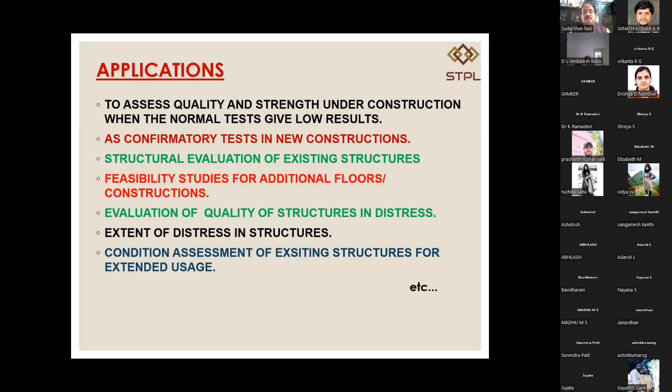Sometimes there is a change of use. For example, you want to convert a space to IT use and put a battery room, and a battery room will have very high loads, to the order of 1 to 1.5 ton per meter square. Most of our commercial buildings are designed for a maximum of about 400 to 500 kg per meter square live load. So where they are going to house batteries or any additional loads, that needs to be checked for structural adequacy, whether it can take the load or not. Such studies can be done through NDT.

Then suppose there is a problem in the structure, some distress, cracks, deflections, or leakages happening. We would like to know what has happened to the structure, whether there is a problem, or why this distress is happening. Through NDT we can find out what the distress is and what the extent of distress is - whether it is really alarming, or in an intermediate stage, or a very mild stage, and whether it can be repaired. Once you know the extent of distress, it becomes easy to work out suitable restoration measures.

And the last one, now picking up especially in more educational institutions, is that the central government is asking them to provide a building stability certificate. Colleges and schools have to provide building stability certificates, and for carrying out such condition assessment of existing structures, non-destructive testing is a must. In fact, it is already prescribed that non-destructive tests must be done to carry out the structural stability study of all educational buildings.

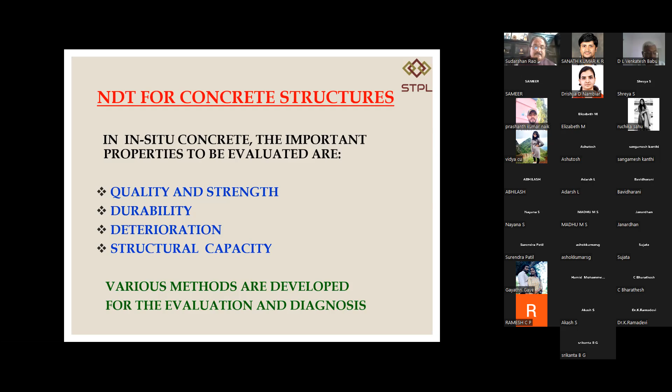To arrive at all these things, there are various methods available. So the testing on concrete structures is basically divided into 4 parts: non-destructive testing, destructive testing where we test to fail, semi-partial destructive tests, and performance tests. So the testing is divided into these 4 types.

So these are the typical definitions. Non-destructive test means testing the structural members without any destruction or damage. We don't cause any destruction or damage to the structure, and then the tests are carried out. Semi-partial destructive test is the testing of members with minimal damage but not affecting the structural integrity.

Like we take a core test or drill a hole. So these are all some localized damages, minimum damages we do, but which will not affect the structural integrity. But still there will be some minimum damage done, so that's why it's called a semi-destructive test.

Destructive test is basically done on precast elements or typical members wherein we would like to know what is its failure load or its structural ultimate load carrying capacity, and then we test one of those members to failure. So they are all destructive tests because that element cannot be used afterwards.

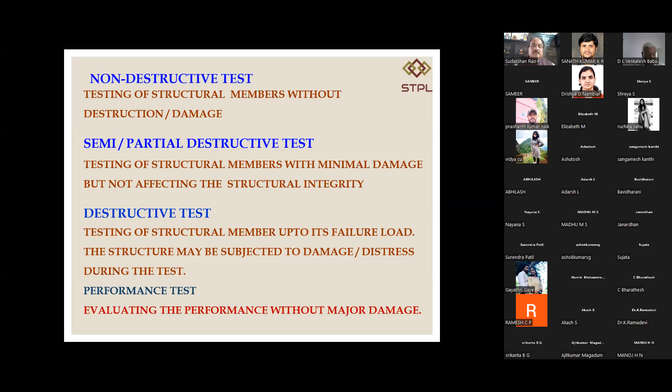And coming to our non-destructive tests for our studies, these are the devices which we use normally. I think most of you know the basic and very simple rebound hammer test, the Schmidt rebound hammer test, then UPV ultrasonic pulse velocity device, impact echo tester, tomography scanner which has come recently into the market and is becoming quite popular. Then cover meters, ground penetrating radar, Halfcell potentiometer test, field permeability apparatus, endoscopy, borescope, crack measuring devices, infrared thermography, pile integrity test.

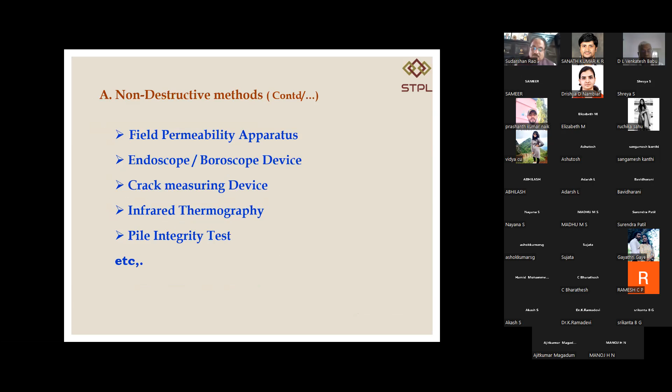Of course, the list goes on. So I'm limiting to this. You can find out many more.

Coming to semi-destructive tests, we have Windsor probe test, cross-hole sonic logging test, Capo test, lock test, bond or adhesion test, core test, then chemical kit for testing of hardened concrete, wherein we take a sample of concrete and test it for chlorides and sulfates at the site, then performance load test.

So some of these methods I'm going to cover in my presentations. There is a lot of study which has been done on these non-destructive devices, and it is very well covered in various standards and regulations all over the world. So these are some of the listings which I have done, so that in each country there is a standard which has been developed for this non-destructive testing. For BIS, the latest is IS 516 and 456, which will give us the details about this testing and the interpretations. So like that, you have so many standards from so many countries.

So coming to non-destructive, let me take you through a few instruments. This is the basic instrument, the rebound hammer test, the N type, which is normally used because we have different types of rebound hammer tests - rebound hammers for masonry, for mass concrete, for thin members, and for normal concrete. So for normal concrete, N type is very widely used.

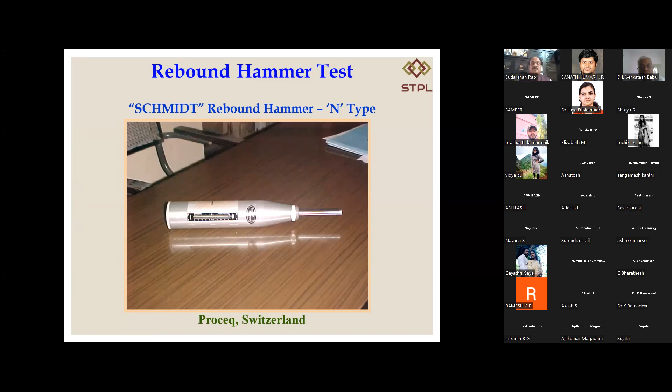So what it does is measure the in-situ strength of concrete near the surface based on the hardness and penetration resistance. The hammer measures the rebound of a spring-loaded mass impacting against the surface of the member. The plunger of the hammer will hit the concrete surface with defined energy, once it is released by the spring, and its rebound depends on the hardness of the concrete and is measured by the test equipment. Then there is a reference chart, for the given concrete, and based on the rebound value, you can find out the compressive strength.

So this is a simple section which explains the working. You have this spring, this plunger, and this mass. You go on pressing this and the spring elongates, imparting certain energy. Once it reaches the latch, it gives way and the mass falls onto the plunger. Depending on hardness, this plunger rebounds. If the surface is very hard, the whole impact energy gets rebound, so you get a high value.

Suppose if this is a soft surface, then you get a mark here and the rebound will be less, so you get a low rebound value number. There is a counter here wherein you can measure the rebound number in terms of number, and that number is correlated to the strength of concrete.

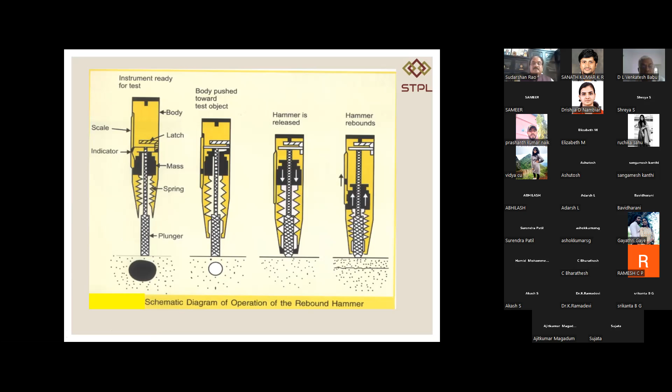These are some of the advanced versions where nowadays you get rebound hammers with recorders, or with chips wherein it can be easily stored. These are some of the latest digitized rebound hammers available, and you can even load or feed it with the calibration strength so that you get the concrete strength directly. If you have a calibration chart, that can be fed in, and when you hit, instead of getting a number, you get the strength of concrete directly. These are all the latest ones available.

The test requirement is that it should be conducted on the concrete surface. It should never be done on a plaster surface. In case the member is plastered, which happens in most existing structures, you have to cut open the plaster, expose the concrete surface, clean it, and make it as smooth and uniform as possible, then carry out the test on the dry concrete surface. You should not do it on a wet concrete surface. One has to be quite careful.

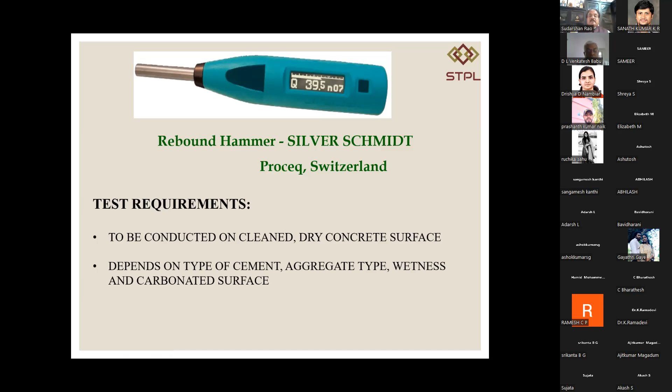Even though it looks a very simple test, one has to take a lot of care while doing it, because you get a very wide range of readings sometimes, and you have to leave out the freak readings. At a given location, if you are getting low readings, you have to find out further, examine why. Maybe it may be a debonded or delaminated concrete due to corrosion, or maybe some other reason. You have to find out exactly why you are getting low readings, and that's how you have to arrive at it.

This is very important, because as I told you, this rebound hammer has got a spring inside. Every time we hit the rebound hammer, the spring elongates and contracts. It has a life, maybe about 5,000 or 6,000 repetitions. Afterwards, the spring loses its stiffness and your readings will not be the correct ones. You may start getting erratic readings. That is why before you do the test every time, you have to do this calibration using this anvil.

Only when it shows that reading does it mean your spring is still in good condition, and then only can you use it in the field. If it shows a very different reading, that means the rebound hammer spring needs to be changed or serviced. So before you do the test, always check it with respect to the anvil, and only then carry out the test in the field.

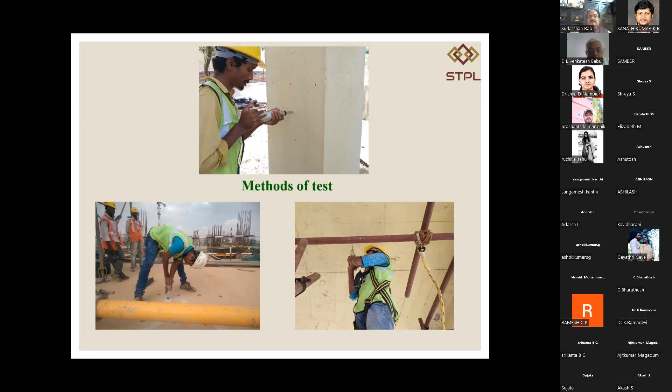This is how the tests are done, either horizontally or vertically in different situations. If you want to do it on a floor slab, it is held vertically downward. For columns it is horizontal, or if it is a slab ceiling, it is held vertically upward.

When held in different positions, the mass will be moving either against gravity or towards gravity. Accordingly, the rebound hammer numbers will change and we need to do corrections. These are the corrections given by the instrument manual.

For example, if it is held upward, your weight is drawn by gravity, and hence you get a higher reading when the rebound occurs, since it is drawn by gravity. So the correction has to be negative.

Similarly, when holding it downward, the rebound is occurring against gravity, so it gives a lesser reading, and you have to do a positive correction. These are the corrections given by the instrument manual, and every instrument you purchase will have these corrections, which should be adopted for rebound hammer tests done at different positions.

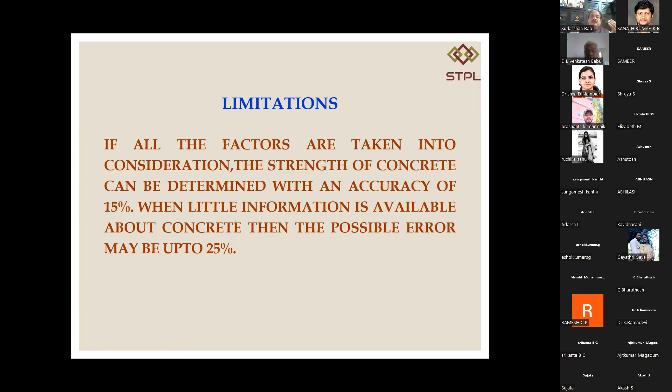If all the factors are taken into consideration, the strength of concrete can be determined with an accuracy of about 10 to 15%. When little information is available about the concrete, the possible error could be even up to 25%. This percentage of prediction depends on experience - a person with good experience who does the test properly can achieve less and less error.

Coming to the ultrasonic pulse velocity test, this is measured by passing the pulse velocity through the body of concrete. The measurement of ultrasonic pulse generated through piezoelectric crystal probes to the concrete is indicated in the timing device.

It is used generally to check the quality of concrete - the compaction, uniformity, delamination, cracks, presence of honeycombs, voids, etc. One thing you have to be careful about: ultrasonic pulse velocity test will not give you the strength of concrete.

If you have to go for strength, either do a rebound hammer test or go for a core test. Whereas for a lower grade of concrete, up to about M25, you can generate some calibration graphs to arrive at the strength of concrete.

But for anything more than M25, the readings are going to be almost the same. For M40 concrete and M30 concrete, there is not much difference in the ultrasonic pulse velocity values, and hence it is very difficult to arrive at exactly the strength of concrete through UPV tests.

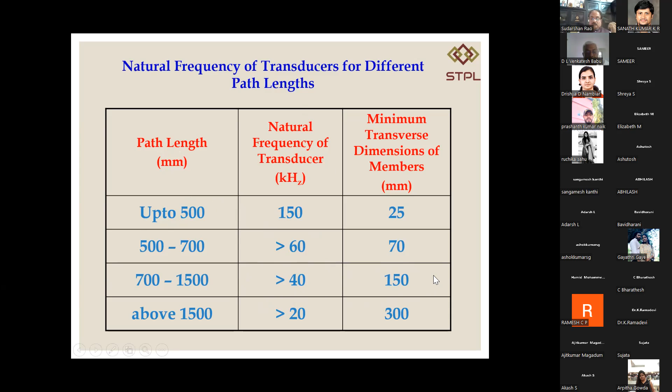Depending on how we hold the probes, there are three methods: direct transmission, indirect transmission, and semi-direct transmission. It depends on the accessibility of the given member and the surface available for testing. For example, in most beams and columns, you can put the two probes on either side of the parallel, opposite surface. This is the easiest and best way of doing the test, where direct transmission happens.

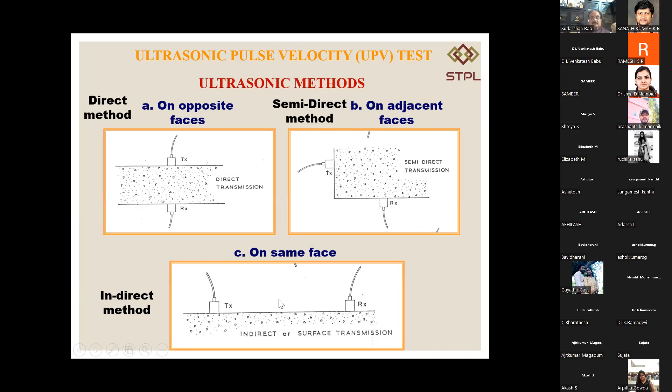Ultrasonic pulse velocity again depends on many factors, like the aggregate size and the minimum path length we choose. The path length should be at least more than 4 times the aggregate size. That means if most of our concrete members are made with 20 mm down-size aggregates, then your minimum path length should be at least 80 to 100 mm, so that you can use this test.

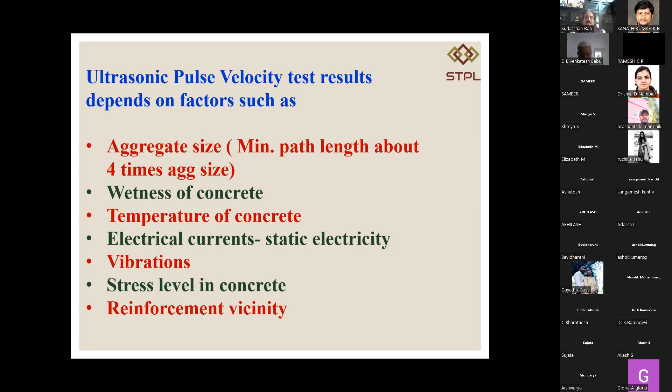There are some studies done to find out whether there is variation in ultrasonic pulse velocity at different stress levels, and it shows there is some variation. Also, if there are any reinforcements in the vicinity when you do the test, you get very low path or time taken, like only 5.6 microseconds for the pulse to pass. This shows that the pulse is passing through the reinforcement, and you have to shift the location of the probe.

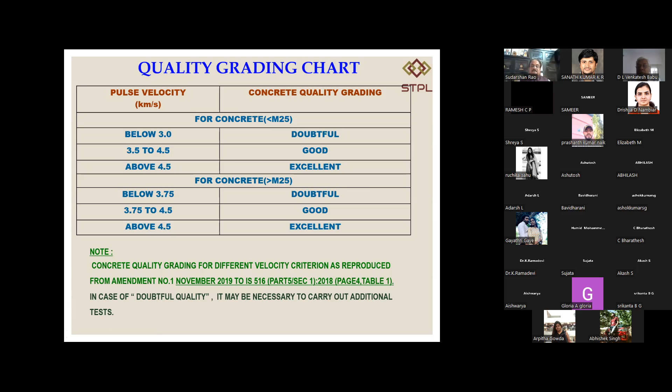In case we want to predict strength, below M25 grade of concrete you will be able to predict it with some accuracy. For that, you have to establish your own calibration chart: cast cubes of various strengths, find their ultrasonic pulse velocity, and also carry out compressive strength tests. Then plot ultrasonic pulse velocity on one axis and strength on the other axis to draw a calibration chart. This can then be used for strength assessment. But for higher grades of strength, more than M25, you will not be able to predict this accurately.

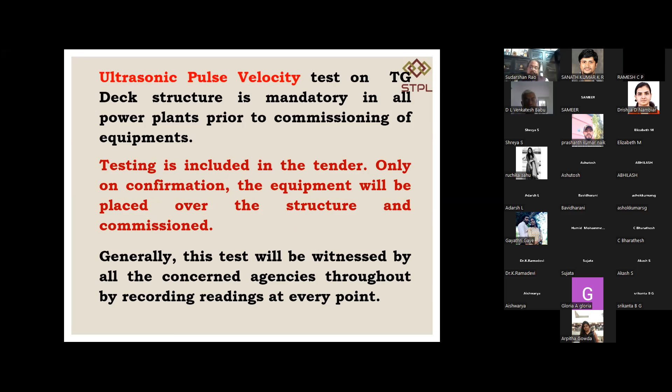This is one of the applications where we used ultrasonic pulse velocity. In most power plants, before erecting the turbo generator foundations, it's mandatory to check the quality of concrete through non-destructive testing. It's a huge structure, as you can see, with slabs about 1.5 meters deep, and it's an elevated structure. They would like to find out the overall uniformity and quality of the concrete.

For that, we make a grid of 300mm by 300mm, with each point being a position where the probe is kept. Wherever possible, you can use either semi-direct or direct methods. For example, this surface can be done direct, this wall direct, but this block and this other section only semi-direct will be possible. You have to devise the method accordingly, and you get more than 3,000 to 4,000 readings, which you analyze and plot to conclude whether the concrete quality is quite uniform or not. This is one of the tests we carried out.

That's how this marking is being done. And what you see here is grease being kept, which is used as a couplant for the probes. And this is the top of the generator foundation. And this is how it is done.

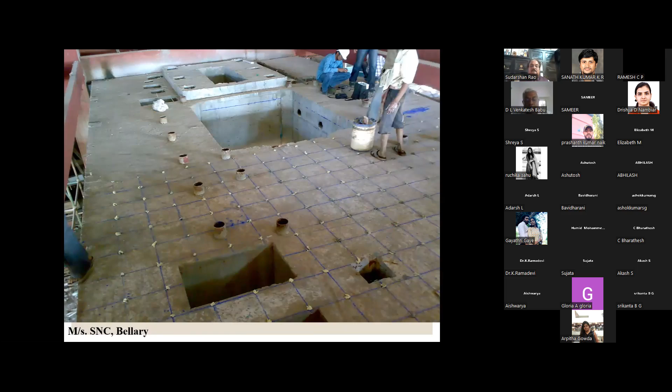For example, in this case, only indirect method is possible, and for this one, you can do direct. So all types of methods we use. Based on this, we carry out the test, plot all the values, and come to a conclusion regarding the uniformity and quality of concrete.

So these are the limitations of the ultrasonic pulse velocity test. For larger path lengths, you need attenuators, and maximum we can go is up to 2.5 meters. Beyond that you will not get good readings, because the ultrasonic pulse gets diversified or dispersed, and hardly you will be able to receive anything.

So larger path lengths again has a limitation, and very thin members, as I told you, has a limitation. It can help only in quality grading - good, better or excellent concrete - but no strength determination.

And local deformity in concrete will be very difficult to find, because unless we probe that exact area, we will not be able to find out a localized deformity or the location of deformity.

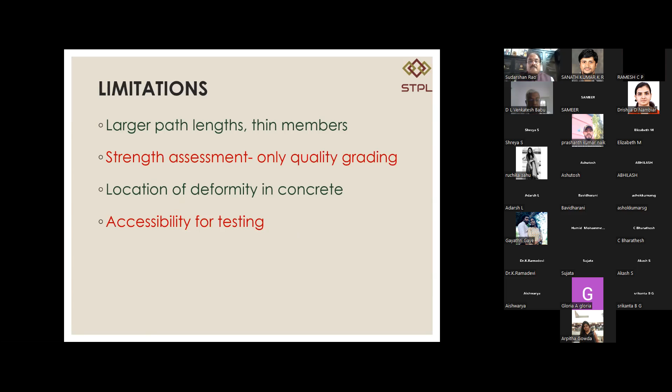Accessibility for testing is also a challenge, and it depends on the type of structure. So with all these limitations, this is still a very handy and useful test, which can be used to arrive at the quality of in situ concrete.

Then we have the impact echo tester. Earlier we had one transducer and one receiver, wherein the pulse was passed through, whereas here you have a single probe, and we produce a small impact on the surface of the concrete. The impact passes inside, comes back, and the probe receives the impact vibrations, which is then analyzed.

The resulting displacement versus time signals are transformed into the frequency domain. Plots of amplitude versus frequency are obtained, and multiple reflections give rise to transient resonances, which can be used to evaluate the integrity. In a solid structure, it gives distinctive wave formations and the spectra is produced. If there are flaws, the patterns get disrupted, and depending on the pattern, we can find out what could be the defect inside the concrete.

And this is very powerful and useful when only one surface is accessible.

This is how the test is done. So you have a transducer receiver, and a small hammer, and you give a small impact blow. The vibrations or waves produced go into the concrete, and once it hits a hard surface, it...

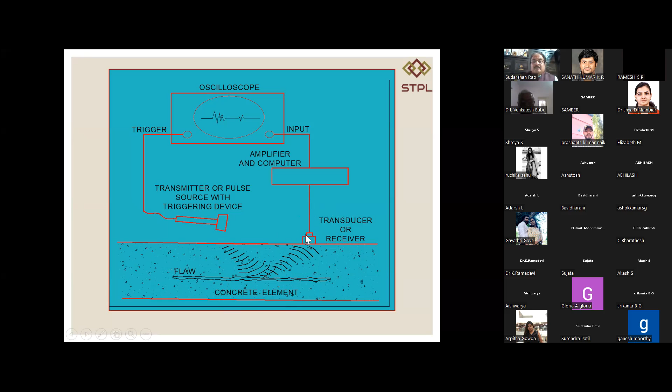So based on this, you will be able to determine what the defect is in the concrete.

So this is how the test is done, using a probe and a small hammer. It can be tested on beams, slabs, concrete, retaining walls, and all that. One thing is that this test is done at only one location and one point, and you have to carry it out at a number of locations to find out.

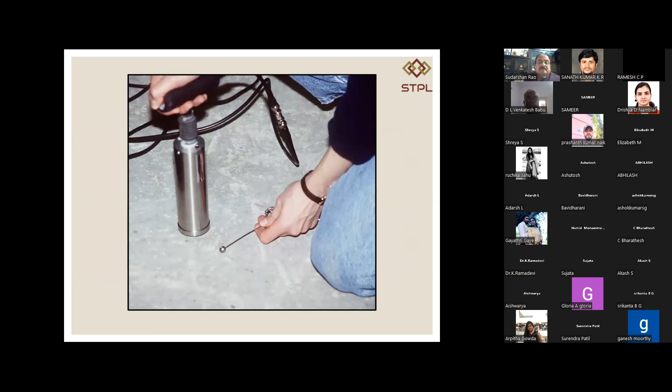There is an improved version of this called ultrasonic tomography, which is a combination of impact echo and ultrasonic pulse. Here it has a series of probes, about 40 to 45 transmitting and receiving transducers, and each of the probes can act as either receiver or transmitter with a default operating ultrasonic frequency.

When you run this device on the surface of concrete, it gives a number of signals. It measures the time of signal propagation between the transducers at fixed distances for material velocity calibration, and uses synthetic aperture focusing techniques, a software technique for analysis in scan mode, to reconstruct the medium below the measurement based on the wave reflections.

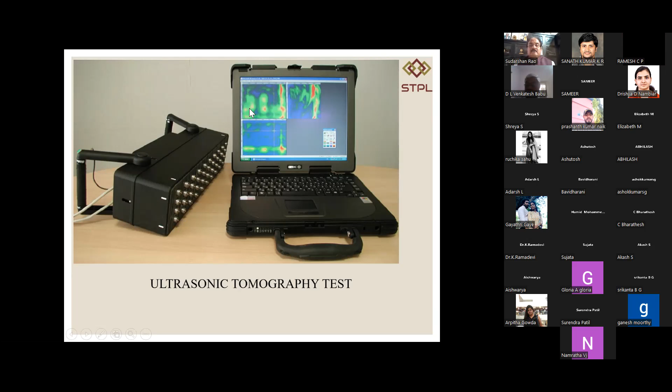That means you have a number of probes. This is the equipment, and you can see there are a number of probes here, about 40 to 50 probes. This comes with the analyzer, and it can give you 3D images of the concrete and what is inside it. It can directly tell you.

This operation applies the echo technique, and it requires access to only one side of the object. Even if only one side is available, you will be able to use this instrument. It is feasible for concrete inspection, for searching conduit ducts and the health of pre-stressing cables, and for finding foreign inclusions, holes, honeycombing, cracks, and other defects inside concrete objects.

The advantage of this is that it can actually locate where the problem is and give you a 3D picture of the concrete. So this is how it is done. As I told you, it has a number of probes that send out pulses which pass through, and each one acts as both a transmitter and a receiver, and you get a number of signals which are processed.

So it can be used on one side, either in a tunnel lining, if you want to know how good the lining is, or on walls, or on the floor. So for any structural element, it can be used.

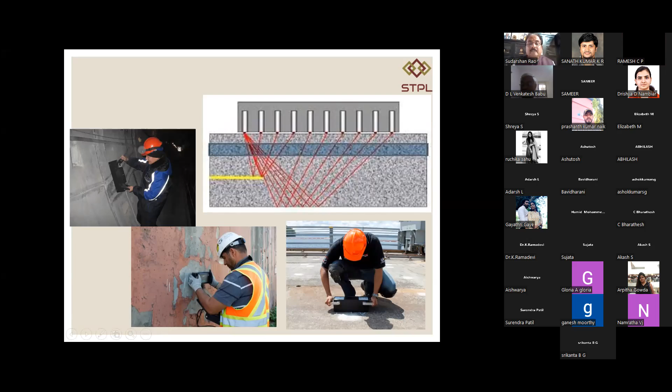And this is how the images you get look. You can get a 3D image, and it can give you the location. For example, here, all these lines you see are the rebars. If there is any problem below, it will show up, and you can take a slice and know exactly where the problem is. For example, here, this is the bottom of the member, that's why it shows one reflection.

And there are some voids here - there may be some reinforcement lines, and there are voids here. So you can find out exactly the location and depth, whether there is any foreign material or a void. All those things can be found out, and it can be sliced, and then like a body scanner, you can take out the images and check.

So this instrument is becoming quite handy and more useful, especially in thin members and also in PSC members, for knowing if there are any problems or surface cracks. You would like to know what depth the crack has gone into - is it extending through, or ending at some depth. All those things can be done through this tomography.

Then coming to parameter tests, after concrete, we will go to reinforcement. The cover meter test uses electromagnetic pulse induction technology to detect rebars. Suppose you have a slab with bars, and you would like to know what reinforcement is provided, the spacing, and at what depth it is - these things can be done easily with this cover meter or profometer, which works on an electromagnetic principle.

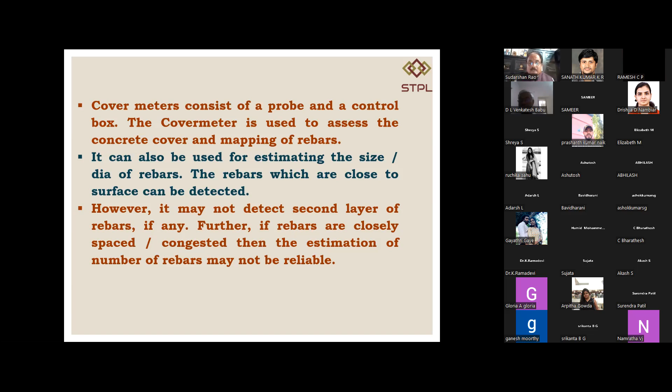This is one of the earlier cover meters, the profometer. The Proceq equipments came up with this kind of instrument. Initially it was not digitized, it was with a meter. You have to go on moving the probe, and suddenly when there is a change in the reading, you know that the reinforcement is there in that location. That's how this was used in the earlier days - in the 80s this was the method.

Now it has come out very handy - you can just run or pass it over the concrete member and you will get the probable diameter and the depth. These are the cover meters, named profometers by Proceq, and there are different types which have evolved: profometer 2, the very primitive one I showed, then profometer 3, then profometer 4 which had different probes - one for the cover and one for the diameter. Now we have profometer 5 and profometer 6, wherein a single probe can be used both for determination of diameter as well as the cover depth. This is the latest which can be used.

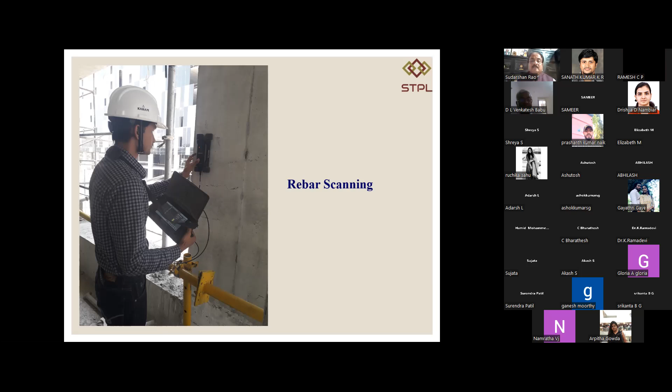So this is another one by another company. Again you can see here the rebars can be mapped.

And Hilti has come out again with this Ferroscan. This is also a very handy equipment wherein you can just use this and roll it over the concrete surface. Wherever the reinforcement is, it will catch it, and then it will give you a diagram or a drawing depending on the position of the reinforcement, and also you get the bar diameter. So this is one typical output image wherein you can find out the bar diameter and also the position of bars.

This limitation aside, it is very useful for structural evaluation, where in the absence of drawings we have to find out what rebars are provided, what is the spacing, what are the numbers, and all that. So for that, it is very useful.

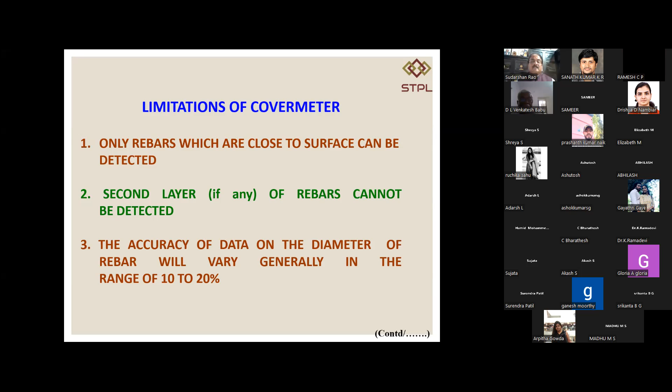However, the limitations are: only bars very close to the surface can be detected. A second layer, if it is there, cannot be detected. And the accuracy of the diameter of the bar will generally be in the range of 10 to 20%. Suppose you get 18mm as the diameter of the bar, it may actually be 16mm or it could be 20mm - so you have some 10 to 20% variation on the bar diameter. You may not be able to predict accurately because most of the bars we use are high yield strength bars, which don't have a perfectly round diameter because of the presence of ribs and all that, so you will not be able to accurately predict the diameter of the bar.

And if the bars are placed very closely, like in some deep heavy beams and all that, it becomes a bit difficult to find out the actual number of bars. Generally, if the cover concrete is more than 60 to 75mm, it will again be difficult to locate the position of the bars. So up to about 60 to 75mm, normal cover meters will be able to find the bars. But now they have some new models which can go up to 185mm. The normal cover meters in the market will be able to go up to about 60 to 70mm.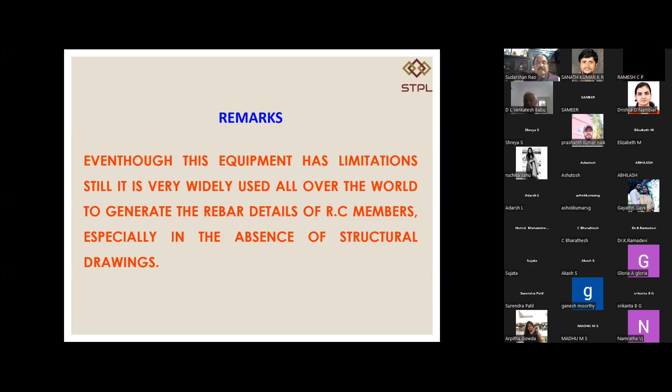But as I told you, in the absence of data about the rebars, this is a very handy tool wherein we can find out the position, disposition, bar diameter, and all that in structural members without really breaking open or keeping open the concrete.

Then we have this latest one, the ground penetrating radar. This is a geophysical method based on electromagnetic wave propagation. Earlier we had ultrasonic wave propagations or impact waves.

Now this depends on electromagnetic wave propagation, because it goes to quite deeper depths. That is why we need a strong wave, and it detects the interfaces between materials having various electrical characteristics. So when we place the probe on the surface, the waves go down, and whenever there is a different material or a void, these waves get reflected and again they are captured.

Depending on the extent to which the waves are captured, they are synthesized, and then we get a picture of those obstacles or variations. Depending on the reflections, we will be able to arrive at the type of object inside, or whatever the defect.

So the system has an antenna which has both the transmitting and receiving probes, and then it has a central control unit which governs the characteristics of electromagnetic waves. It amplifies the received and reflected waves and converts into a digital format. And then we have a video display unit which receives the digital format, processes it through the software, and produces a graphical output as a two-dimensional depth profile.

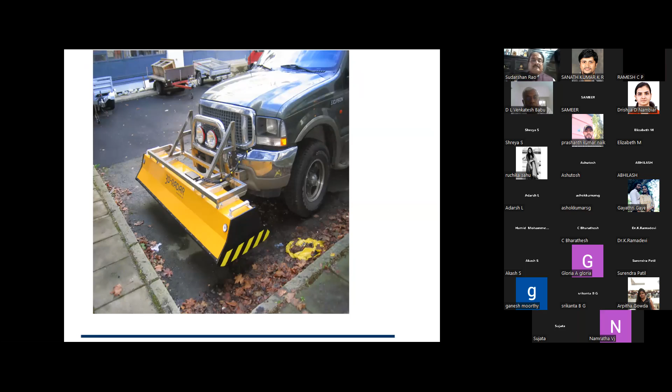So this is the basic principle: the electromagnetic waves go in and then hit different surfaces, then get reflected. You get different reflections, which are again synthesized, and then it comes out in a graphic format.

So these are the different applications of ground penetrating radars. Suppose you have a very short range, up to a depth of about 1.5 meters, like our pavements, road structures, foundations, bridge structures, and building structures, the beams and all that. For that range, we use very high frequency probes, and the frequency will be in the range of about 1500 megahertz.

And if you are going for a medium range... sometimes if there is a second layer of reinforcements, this can detect it, but it may not be able to give you the diameter. It can tell you whether this second layer of reinforcement is present or not. That can be done with this ground probing radar.

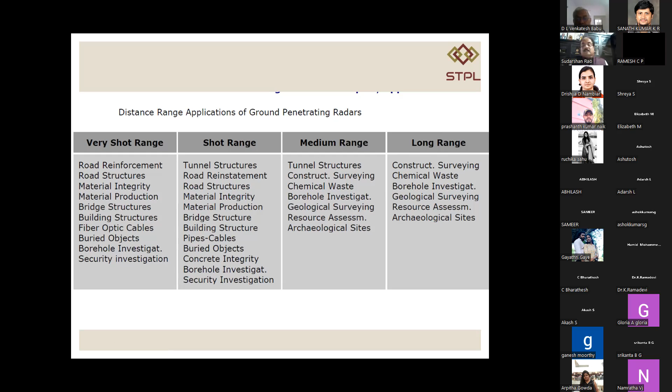One of the applications of this GPR was in the inspection of the Ayodhya site at Ram Mandir, to know whether there were any underground structures. Long range probes were used, and with that they were able to predict that yes, there is something inside the ground.

So this is how the application works for concrete structures. The central processing unit can be kept, and then you can move around. This is a typical view of our slabs. You can find out the bars, rebar, circular, and it will give a wave shape like this.

So this shows that there is a top set of rebars, and then you have a base set of rebars here, and then there is a beam here, and again there is a beam. It will not give you what we saw in tomography. It will give an indication, and it requires sufficient experience to analyze these images.

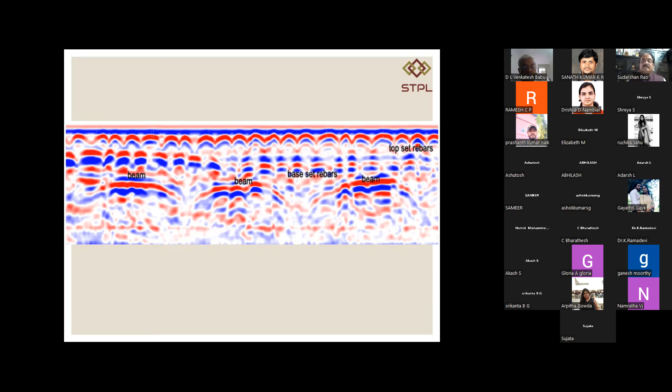So you can see here different ways of doing this. Nowadays, this GPR has become quite handy. Even in small sizes it has come, which can be used, and you will get the image processor in small ones. Especially, this application can be done for concrete structures.

And in case you have embedded pipes, this is how the image comes. So this slab shows the top layer of bars, and this is the location of the pipes. A circular object will be shown as some sort of a parabola, because of how the images are formed when they hit and reflect, finally a circle turns into a parabola. So you need some amount of knowledge to decipher these images, and based on that you can scan the concrete.

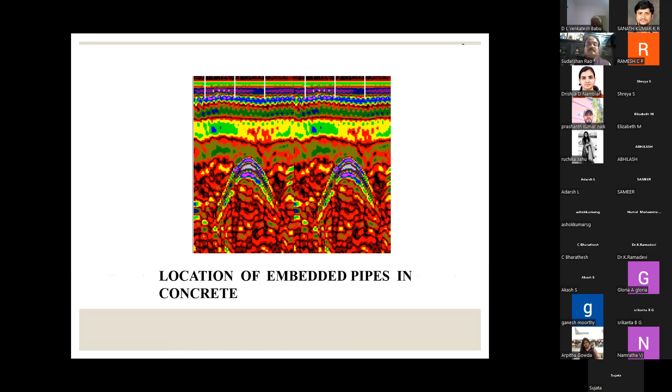Typical applications include GPR surveys on walls, like retaining walls. You can do this with this instrument. The advantage is that it's very handy. It can be moved around, and most surfaces of overall structures can be covered for scanning.

And these are some more applications. If you're scanning a slab, as I told you, the rebars will be seen as parabolas and similar patterns. So they have done the test at the pipe location, and that's how these images come, which then need to be analyzed.

The limitations are you need different antennas for different depths. For example, if you're going for deeper depths, you will need an antenna with lower frequency. And to analyze the images, you need proper skill and past experience. Otherwise, interpretation is quite tedious.

The objects and interferences are only indicative, because you will not know exactly what they are. Suppose you see there is a pipe inside, you will not be able to know whether it is PVC or metal, or what its diameter is. You know there is a pipe, and you can find the approximate size, and the location, but the actual object cannot be determined.

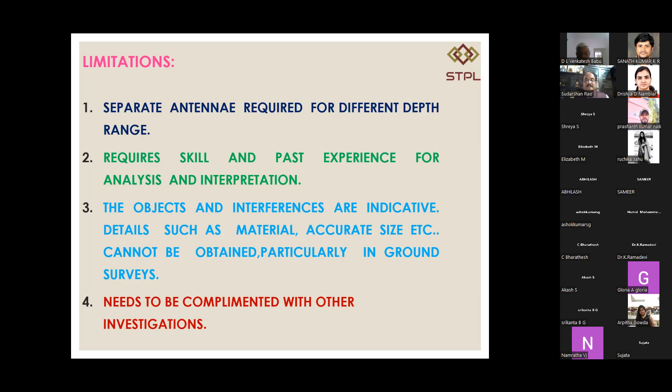This always needs to be complemented with other investigation. So the advantage is you can find out and say there is something inside, and then it has to be checked with further investigation, maybe making a small hole or opening to see what exactly is there. So you can pinpoint if there is a defect, identify it, and give the location of the defect, but what the defect actually is needs to be checked with other methods.

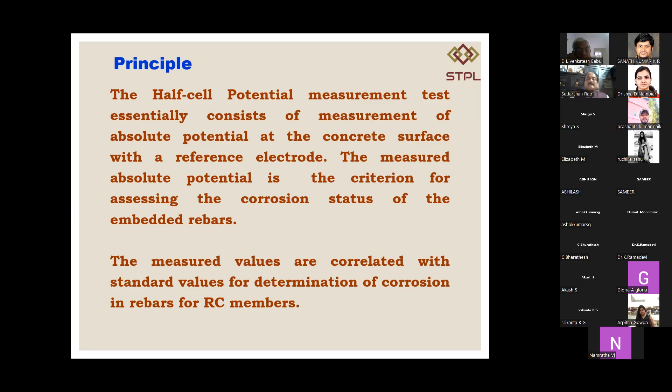Then we come to the Half Cell Potentiometer. This is an instrument used to find out the corrosion, the extent of corrosion, in RC members. The half cell potential measurement essentially consists of measuring the absolute potential at the concrete surface with a reference electrode. This measured absolute potential is the criteria for assessing the corrosion status of the embedded rebars, and the measured values are correlated with standard values.

This is how the scanning is done on a structure, where each point is a half cell reading. So you have a number of cells. If you want to scan the structure, instead of placing and finding each cell every time, you can have the half cells in series, and then record the readings.

Typically, scanning is the most popular method using this instrument. It has a copper sulfate half cell, and then two electrical points coming out - one connected to the rebar, and one on the wet concrete surface. The wet concrete surface acts as an electrolyte to transfer the charges, and the potential difference between these two will tell us.

Millivolts. So like that, we can determine the corrosion status.

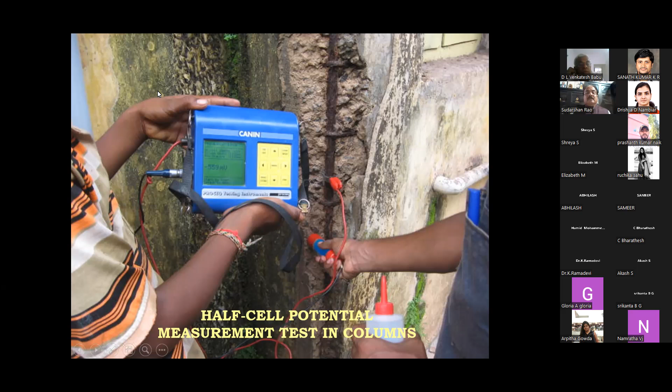Now there is an IS code which has come up for high-rise structures, our Indian standards, wherein they have made it mandatory to measure the field permeability of concrete. And I think these instruments are going to be used more frequently from here onwards. You can find out the permeability either through gas permeability or water permeability.

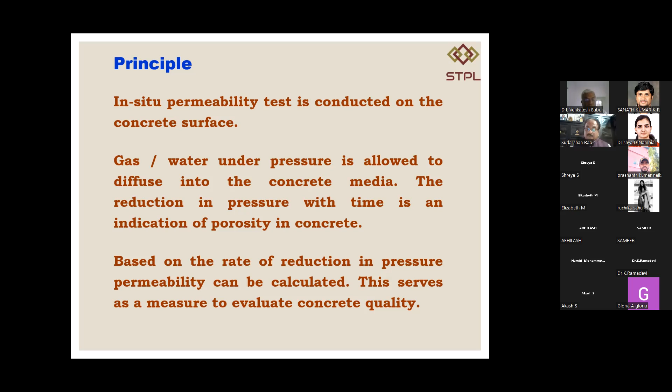Here, gas or water under pressure is allowed to diffuse into the concrete media, and the reduction in pressure with time is an indication of the porosity in concrete. Based on the rate of reduction in pressure, permeability can be calculated. There are standard curves or standard formulae which come along with the equipment, through which we can calculate the permeability of in situ concrete.

Now we have the borescope. Sometimes this is quite widely used in medical applications, like endoscopy, where if there is something wrong with the stomach, to find out what is inside, they introduce a tool with an optical camera and light, and then they examine it. A similar instrument is available for civil engineering applications, and it is called the borescope.

It also has a flexible tube, an optical camera with an eyepiece, and illumination available. We can make a hole, or if there is a void, we can insert it inside the concrete mass, and it travels inside so you can know what's happening actually inside the concrete. It's very useful in health inspection and health monitoring of embedded PSC cables in bridge girders and other concrete members.

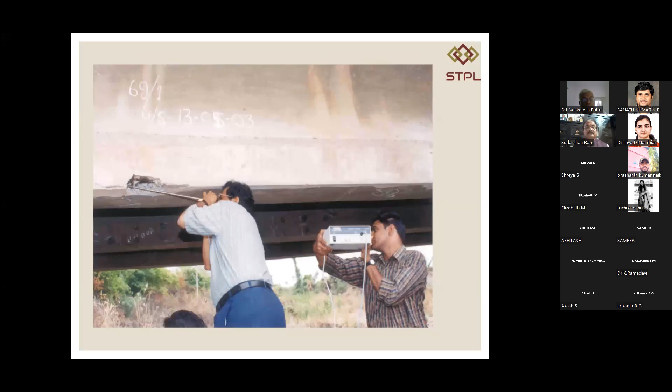This is one of the pictures of a PSC cable which got corroded, and they wanted to know the extent of corrosion. Through this borescope, they make a hole and insert it, and they can capture and know the status of corrosion in the PSC cables. So this is how it can be used.

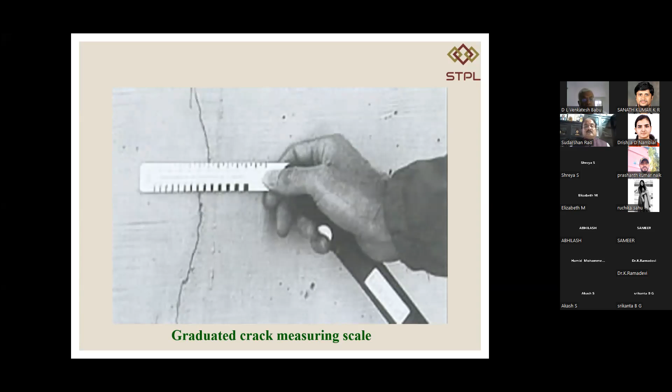We have crack measuring devices. Whenever there is some distress, the building cracks, the structure cracks, and we want to know what is the crack width, and also monitor whether the crack is widening. There are different devices available: a simple graduated scale which you can place on the crack to find out the crack width, or an optical microscope wherein you can read the crack width.

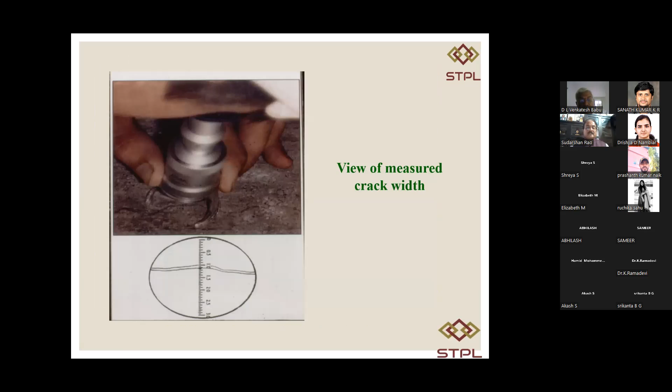Or you have a DEMEC gauge wherein it can be fixed, and if the crack widens, you will get a reading so you can monitor it. This is mainly for monitoring the crack width, whether it's widening or not. There are also typical optical magnifying lenses which can be used to check the crack, and it has a graduated scale inside so you can measure the crack width in millimeters.

There are many things available. This comes with a lighting device, LED. So when you place it on top over the crack, it gets illuminated so that you'll be able to measure it properly.

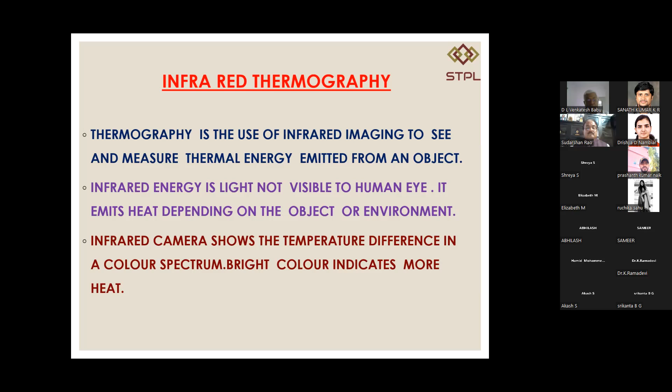If that is captured through an infrared camera, you can find out if there is any temperature variation on the surface of any object or concrete. The change in temperature on the surface of concrete can happen mainly due to dampness or leakage. So when you capture the surface of concrete or a wall, if there is dampness or leakage inside, you will get the regions which are damp, which may not be visible to our eye.

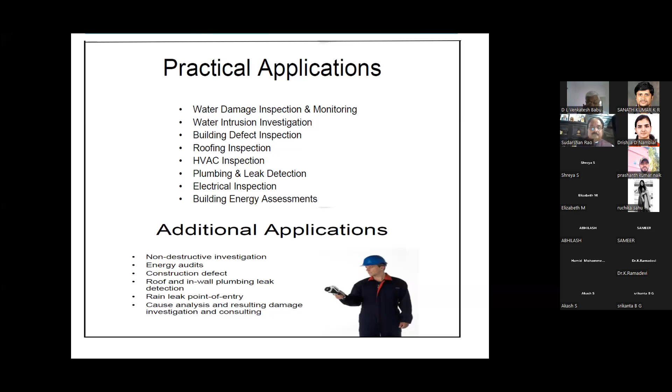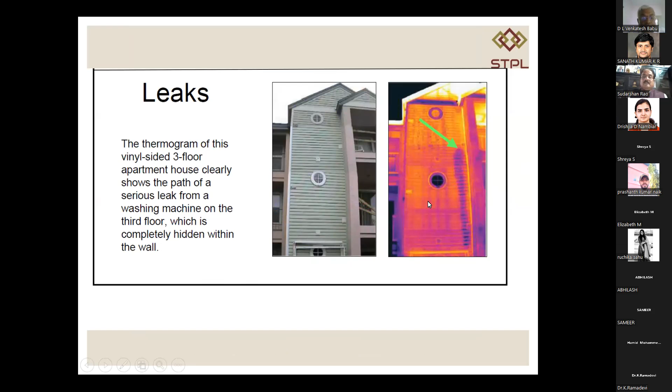For example, if you see this building, you don't see any leakage at all from outside. But when you take it with an infrared, you find that there is a leakage causing dampness. So like this, you will be able to detect easily.

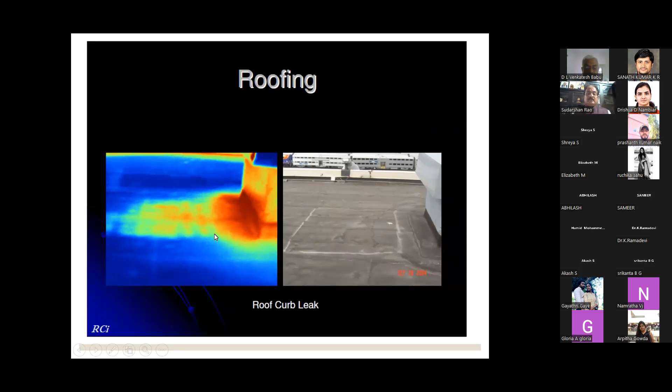Then on the roof, if there is any accumulation of moisture or dampness, even though from outside you don't see anything, these are the areas where there is some percolation and accumulation of moisture or water, which can lead to leakages.

Similarly, in the floor, you can detect any leakages or water intrusions easily using this infrared thermography. The advantage is it's very quick.

It's just taking a photograph and then checking it, and it's a non-intrusive means of investigation. We don't need to do anything to the existing environment, and it does not require any relocation of the occupant, and it's quite illustrative, and can be used for confirmation of failure points and moisture migration paths.

The only disadvantage is it will not see through the walls, and only up to a certain depth, if there is a change in temperature, it can detect. If there is a leakage quite deep inside, then it cannot detect. That's the only disadvantage.

Then we have pile integrity tests, which are used to find out the health of a pile, because once the pile is installed in the ground, we do not know whether the concrete is good, whether the quality of concrete is fine, whether it has formed as a proper shaft or cylindrical element.

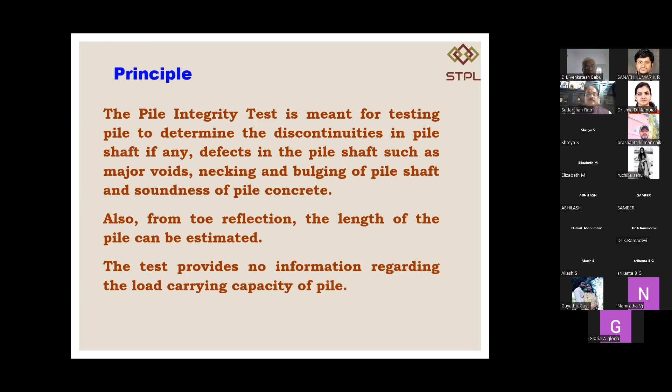Are there any bulging out or necking? Are there any voids in the concrete? We'll not be able to make out anything otherwise. This is a very useful tool, an instrument, through which we can find out the health of the pile.

It's a very simple instrument. It has got a pile tester analyzer, then a hammer to give an impact, and a probe or accelerometer which receives the waves, which is then analyzed, giving the signature of these waves.

You have the pile, and you put this accelerometer on the surface, and then you hit with a hammer, and capture a signature. On the pile, you do this at about 3-4 locations, capture the images, and then synthesize all these images to remove the noise and remove the high frequency waves and so on.

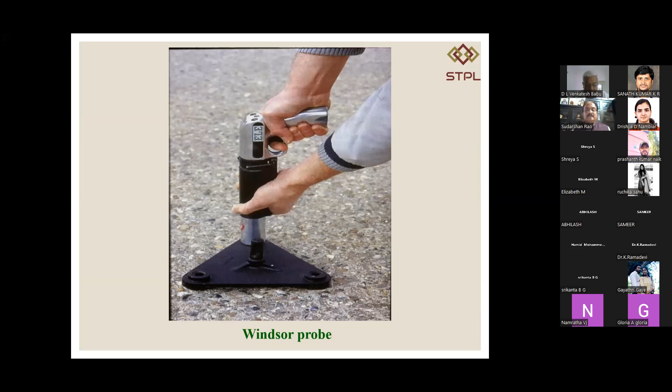Now this test is banned because here what we do is it has got a pistol and then it has got a bullet, and then we shoot it onto the surface of concrete, and then we measure the depth of penetration, and based on the depth of penetration we find out the hardness of concrete. But due to the possibility of this being misused, now this test is banned.

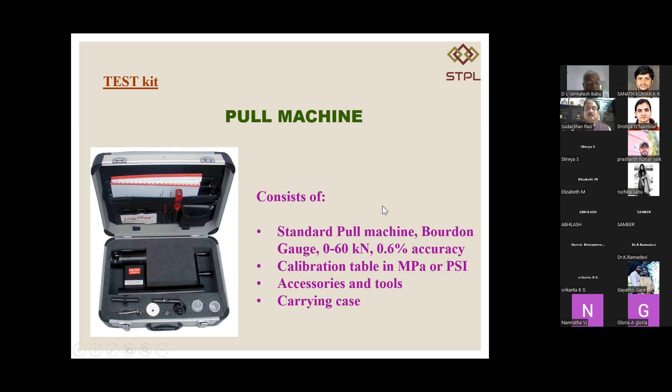Then we have the Capo test, wherein we can find out the in-situ concrete strength. So what we do is, this Capo test machine, it is done on the existing concrete.

So what we do is first we make a hole, and then we insert this, what do you call, a grip expansion bolt inside the hole.

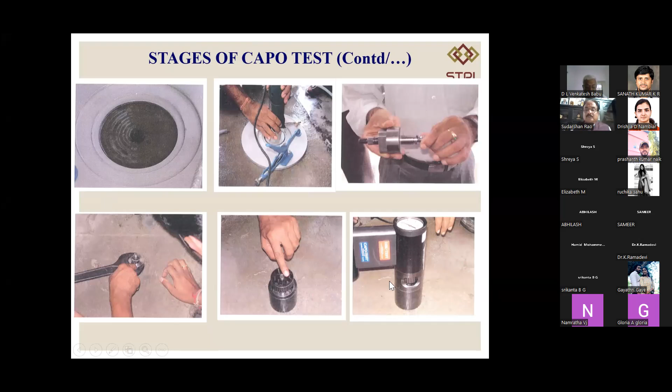And then after that, we put the loading mechanism, and then we operate it like this. And when it is rotated, because of this enlarged base, the concrete comes out like a frustum of a cone. And the load which is taken for this failure is correlated to the strength of concrete. So that's how it is done in the Capo test.

And similar to that is a LOK-test or a pull-out test, but this test is done on preset anchors. That means the Capo test can be done on any concrete, and the only thing is you have to drill a hole, insert this bolt, turn it to make it wider, and then pull out. Whereas in a pull-out test, even before the concrete is cast, these kinds of inserts are fixed inside the concrete or inside the rebar cage using the shuttering material.

So you make a hole in the shuttering material, insert this bolt or anchor, and then tighten it and leave it. Once the concreting is done, at any age, if you want to know what strength is achieved, you just have to de-shutter it, and then fix this device on the anchor, rotate it, and you will know the strength of concrete.

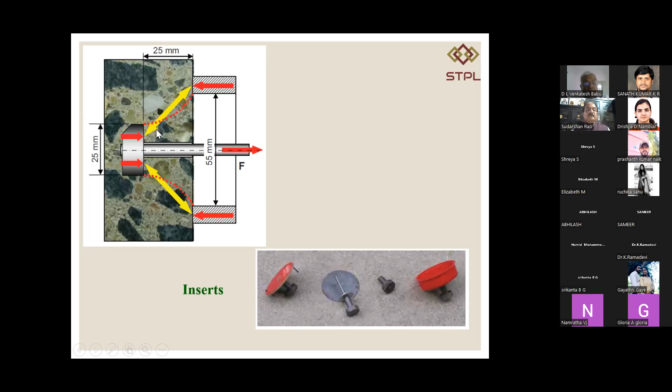So this is how this test is done, the prefixed anchors.

And then we have the bond or adhesion test. Nowadays we have a lot of tiles and coatings which are coated on the concrete or on the mortar surface, and the tiles are fixed. So we would like to know whether it is properly bonded, or what is the adhesion strength. This test is used, and first we make a core to segregate the coating from the rest of the body of the surface, and then you fix a dolly, a pull machine or a dyna pull-off onto the surface with the coating, and then you do a pull-out test.

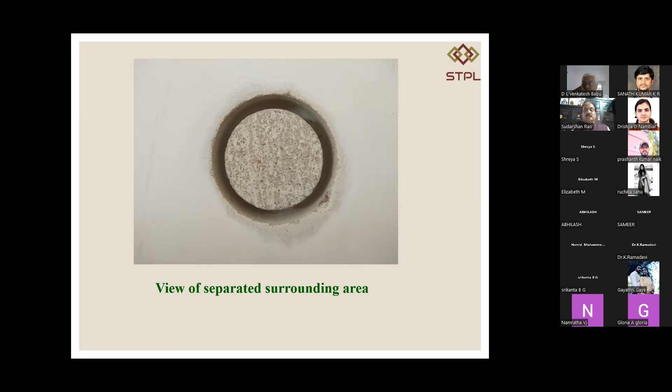So first you make a core, separating this area from the rest of the surface. Suppose you have done the plaster and there is a lot of debonding, and you would like to know whether the plaster is properly adhering, if there are issues with curing, whether the plaster is properly adhering to the masonry or not - then you can do this test.

So you are fixing the dyna pull. This is the dolly, which is glued onto that drilled core, and then the pull-out is done. Based on the pull-out strength, you can find out what is the adhesion and whether it is acceptable or not.

Many times we use anchor bolts or rebar anchors which are embedded into concrete for further construction, so we need to check the pull-out strength. For that, we have designed a device wherein we have a frame with jacks, and it is a pull-out test.

Many times they say they want to test whether it can take 3 tons, 4 tons and so on, so we add another 10% extra and test it up to that. In case they want to know what is the failure, what is the ultimate pull-out force, then we test it up to failure. So this is how this test can be done on the anchor test.

Now the core test is the most widely used and very popular test, wherein we take the core. The diameter of the core to be taken has to be chosen carefully - it has to be at least a minimum of 3 times the aggregate size, and the bigger the core diameter, the better the accuracy. So always try, if there is a possibility, to get a 100 mm core or a bigger diameter core, as that will really give you the most reliable results.

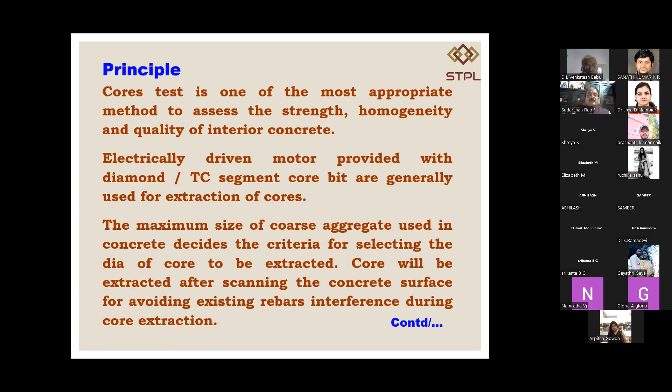And then the cores are taken through core cutting devices - that's how it can be taken from the floor. Before we take the core, we have to make sure there is no interference from the rebars, so we can use a profometer or cover meter to find out the location of the bars, and then fix the location of core extraction so that we can take the core accordingly.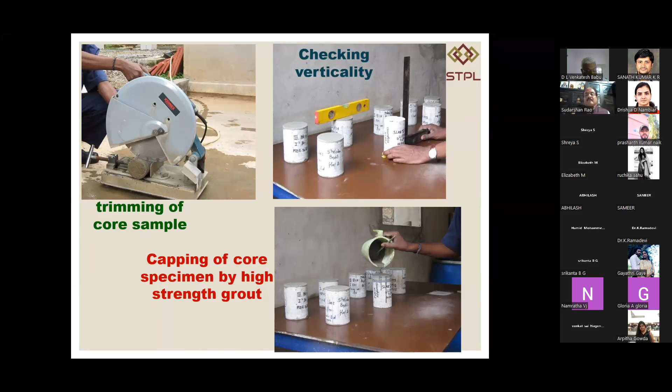So from the floor we can take it, and once the cores are taken, they are trimmed, and you have to maintain perfectly parallel surfaces for testing. Then you have to do capping, and capping is done either with sulfur or with high strength grout, and the capping thickness has to be as minimum as possible to get a parallel surface.

After that it is tested in a compression testing machine, and you have a standard methodology to apply corrections for the diameter, the L/D ratio, and then a correlation between the cylinder - because core is a cylinder - and to convert from cylinder to equivalent cube strength you have to multiply by 1.25. So with all these corrections applied, you will finally arrive at the equivalent cube strength.

If this equivalent cube strength - the acceptance criteria is that the average equivalent cube strength from the cores should be equal to at least 85% of the cube strength. Suppose you have M35 grade, that's 0.85 times 35. So if your average equivalent cube strength from the cores is more than 0.85 times 35, then you can say that it has achieved the M35 grade.

So it need not be M35 and above - it should be 85% or above, and any one of the cores can have strength between 75 to 85. Suppose you test 3 cores, and one of the cores is more than 75 but less than 85, you can still take it for averaging out.

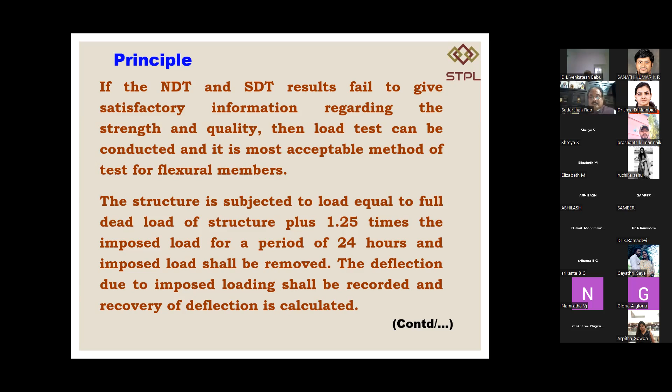As a performance load test, or the tests done to know the performance of the structure, these guidelines are given in IRC standards for bridges, and for a structure it is given in IS 456. We apply a load equal to the full dead load and 1.25 times the imposed load or live load, and keep it for 24 hours. We measure the deflection, which has to be less than the critical deflection. When you remove the load, there has to be a recovery, and the recovery of deflection is guided—for our structures it has to be more than 75 to 85%. For bridges it is 85%. These guidelines are given in Indian standards.

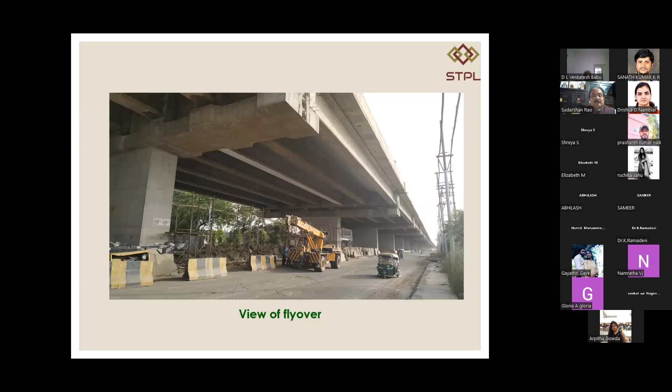This is one of the flyover load tests we carried out. In a bridge or flyover, the loading depends as per the IRC and the design, and it depends on the location of the loading or moving vehicle. So those locations have to be fixed, and the loaded vehicles positioned at those locations. The deflections are measured using deflectometers, kept for 24 hours, and then the vehicles are moved out and the recovery is measured. The recovery has to be more than 85% for this girder to be acceptable, and the deflection has to be less than the critical deflection calculated. That's how the performance test is done.

It can be done either on bridges or on floors. Sometimes people construct a building and want to know what is the capacity to which it can be loaded. So we can take a typical panel and conduct a load test on it to find out its load carrying capacity, or whether it's capable of withstanding a given load. Even that can be found out through this performance test.

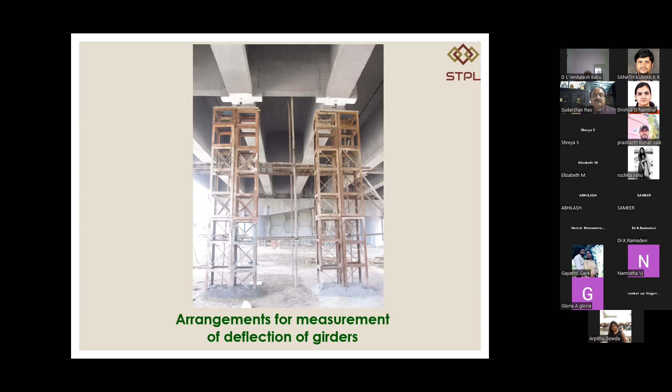Now I'll come to a typical case study of structural evaluation we carried out on one of the structures. This is an office building constructed during 2008-9, a simple building with basement, ground, and floors. Over a period of time, the concerned authorities observed a few distress features like cracks in RC beams and slabs, cracks in masonry walls, dampness in plaster, and deterioration of plaster. The occurrence of all these distress features started giving concern about the structural safety of the building. Hence, they made a reference to check the structural stability—whether it is good or not, or whether they have to vacate it or something needs to be done.

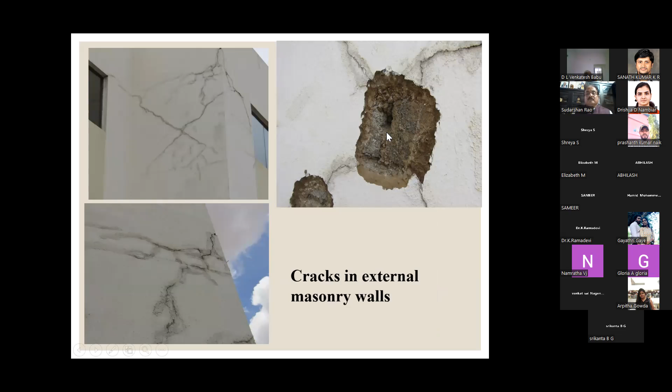This is a view of the building, and you can see quite a bit of cracks and dampness visible outside—that's why they were scared. These are some of the cracks visible outside. Of course, the quality of construction was also not very good; you can see here a lot of gaps, and the quality of mortar used in the masonry was also not very good.

So these were the physical observations made. We found there was basically no settlement or foundation issues, and the columns were good with no distress. Cracks were observed in the floor slab in the basement, possibly due to improper compaction of soil. Cracks were also observed in ceiling slabs, especially at the electrical conduit lines, and at beams in a few locations, along with dampness, damp patches, and leakage.

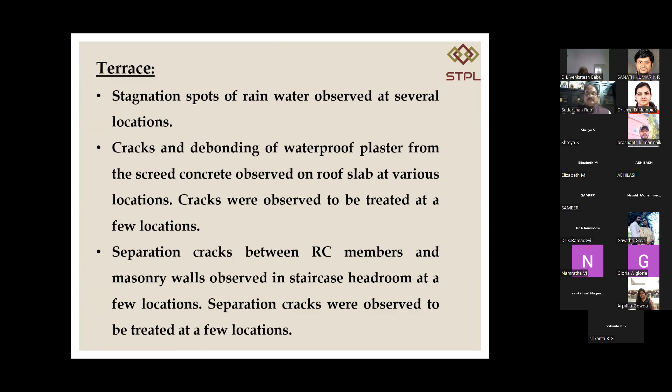A similar thing was observed in the upper floors, with haphazard cracks in the ceiling slabs, dampness, damp patches, and separation cracks between RC members and masonry walls. On the terrace, there was stagnation of rainwater at many locations, and the waterproof plaster or screed concrete had debonded—this could be one of the reasons for the dampness and leakage. Separation cracks were also observed in the staircase headroom.

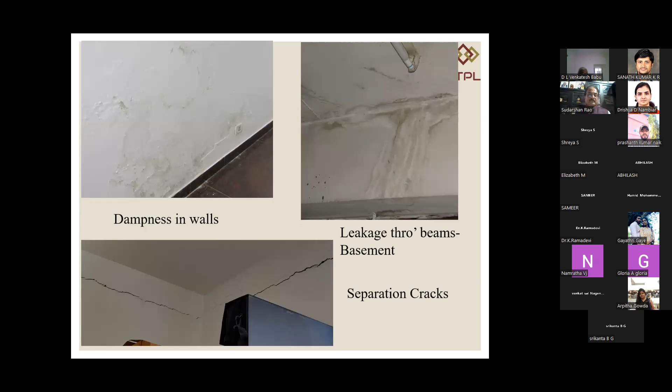On the exterior, as I showed you, there were a lot of cracks in the walls and at the junction of RC members and masonry walls. These are some views of dampness in the walls and RC beams, the junction of beam and slab, separation cracks between wall and beams, dampness, haphazard cracks in ceiling slabs, and on the roof, separation cracks, debonding of mortar, and dampness marks and cracks. So that's why they wanted to know—is there any problem with the building? Is it safe? And if there is a problem, what needs to be done?

So this is how the evaluation tests were carried out. First was dimension verification of typical structural members. We need the size of the members for carrying out the theoretical analysis, so that's why we do the dimensional measurements.

The RC footings were accessible only from one side, so it was difficult to do any non-destructive tests there, and the surface was quite rough. So usually in footings, we take cores.

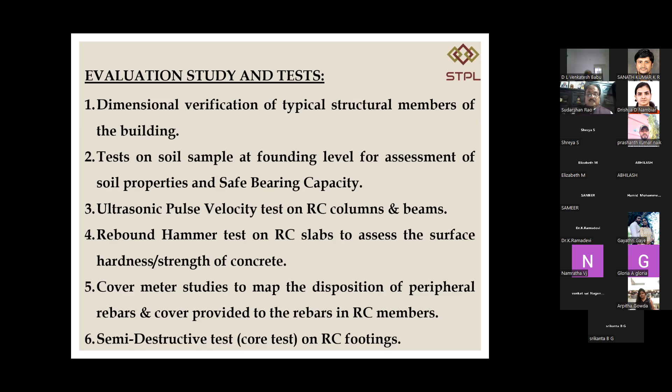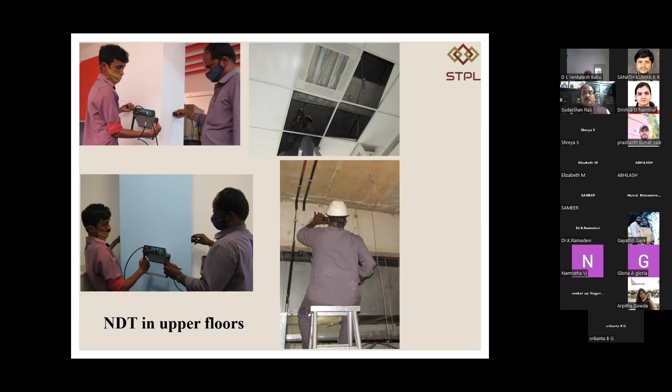So these are the various tests carried out: the cover meter test, rebound hammer, ultrasonic test, and then exposure of the foundation to know the measurement, the size of the foundation, depth of the footing, and taking cores, and again testing on the columns. Because this structure had a false ceiling, not all members were visible or accessible, so we had to remove the false ceiling, go inside, sit, and take the readings.

These are the core test results. The footing showed very good strength with M35, and based on the grade of strength of the concrete, or the concrete quality, we arrived at the grade of concrete, and that was used in the analysis.

The reinforcement mapping, whatever was done with the profometer or cover meter, was used. And considering the age of the structure, more than 10 years, we considered FE 415 as the grade of reinforcement.

For the structural arrangement, whatever sizes we noted based on the drawings made or the structural framework made, a 3D analysis was carried out, and this is how the analysis was done for various forces.

Finally, these are the inferences arrived at based on the evaluation study. The dimensions of existing RC members were found to be in conformity with the drawings that were provided to us. The soil test SBC value was found to be about 19 ton per meter square, and for that load on the column, the footings were adequate.

For ultrasonic pulse velocity, even though there were some cracks in the beams and ceiling slab, the UPV and rebound hammer results showed that the concrete quality is quite good, and the grading comes under the category of good concrete.

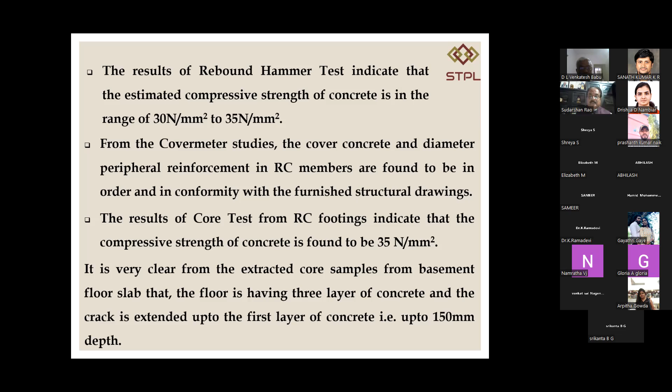Based on all these things, the analysis was carried out, and from the theoretical analysis and verification, it was found that the existing building as it stands is structurally adequate to resist the present level of load safely, considering seismic loads also, as per the codal provisions. That means whatever distress was observed was more peripheral and non-structural in nature, not structural, and as such the basic structure is safe.

So this is the inference we could get from the non-destructive test, semi-destructive test, and the theoretical verification. The haphazard cracks observed in the ceiling slabs were essentially due to shrinkage of concrete at the time of casting, and they were non-structural.

Along the conduit line, whatever we observed, that may be due to the presence of electrical conduit very close to the periphery of concrete. So there is not enough cover concrete. That's why it's possible that the cracks have occurred at that location.

The cracks observed in the infill masonry walls were mainly due to the poor quality of mortar and improper workmanship, as I showed you. The damp patches observed in the ceiling slabs were essentially due to leakage of water from the plumbing and sanitary lines, and through the shrinkage cracks in the mother concrete at a few locations.

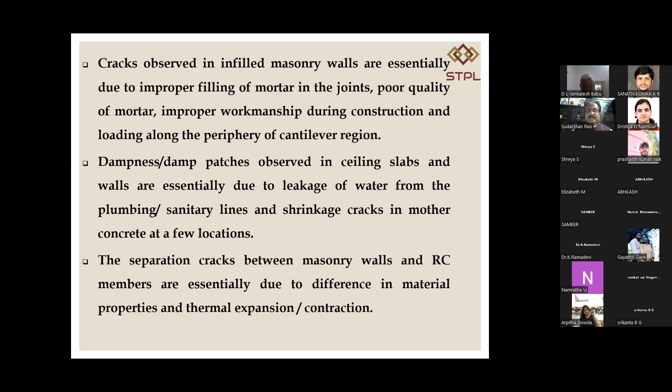Separation cracks between masonry walls and RC members are essentially due to differential thermal expansion, because those two are different materials. So the evaluation study clearly demonstrated that even though there are cracks and dampness in the building, structurally this building is safe. So what we need to do is treat these distresses rather than talk about structural stability. Stability-wise, the building was safe. That is an important conclusion we were able to arrive at based on this evaluation study using NDT equipment.

So these are some of the restoration measures which we recommended, like for the treatment of dampness, treatment for cracks in RC beams, treatment for separation cracks, and treatment for dampness in masonry walls. We had to prepare different sketches and give all the details. These measures were carried out, and they are quite happy to continue to stay in that building. So whatever doubt they had about the structural stability or the structural health of that building, it was quite cleared due to this study.

So just to conclude, non-destructive and semi-destructive tests are very useful in evaluating the quality of construction and to generate data from the structure, especially in the absence of details, as I showed you. Many devices are available for testing. Of course, what I showed you may be only about 50 to 60%.

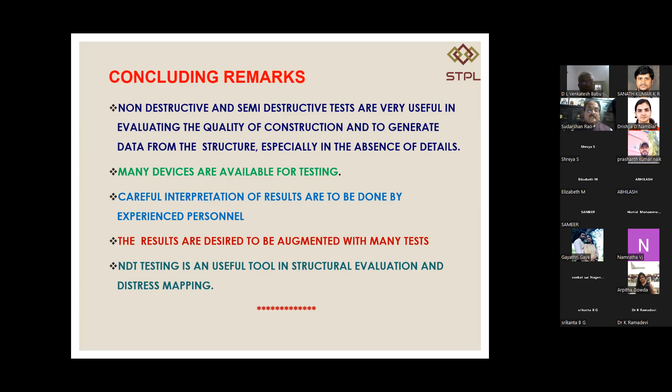NDT testing is a useful tool in structural evaluation and distress mapping, especially in the absence of data. So I'd like to acknowledge my earlier organizations which were helpful in carrying out the study, like Offshore Research Foundation, Civil TECHNOCLINIC, Bureau Veritas, and the present STEDRANT. I have also collected some information from the internet, so I acknowledge all those sources.